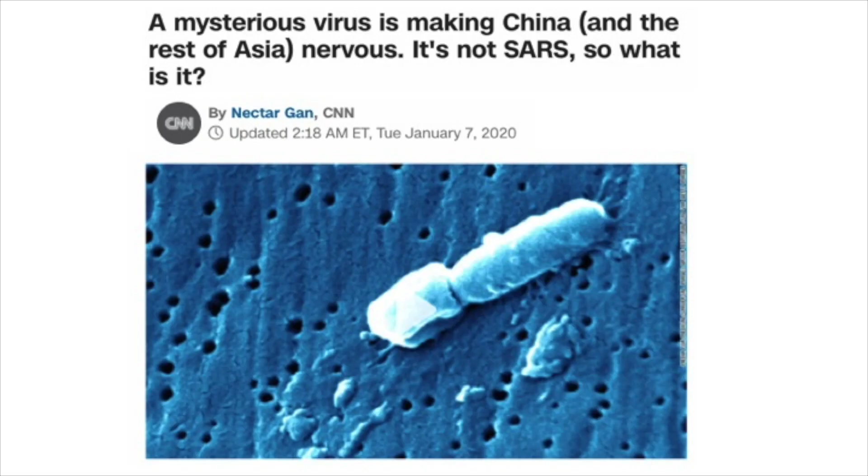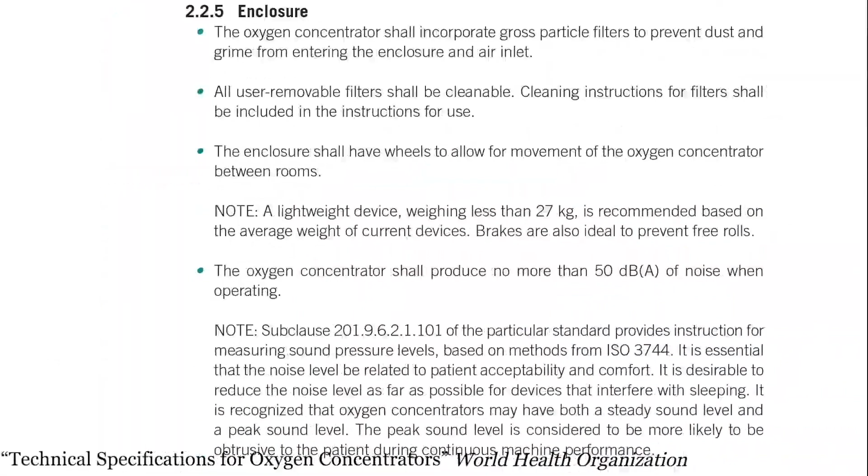We are Mechanical Engineering Senior Design Team Prime 21, working with our sponsor Luke Chow from Prime Manufacturing Technologies to create an oxygen concentrator for low-resource settings. Although there are oxygen concentrators currently on the market, they are not intended for low-resource settings. Our design meets the World Health Organization requirements but minimizes user cost and dehumidifies incoming air to ensure a long device lifetime. These qualities make it ideal for low-resource settings.

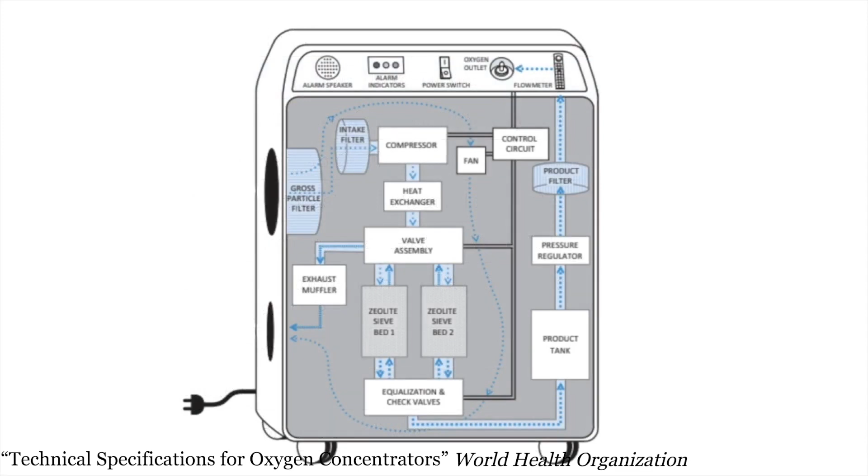Our oxygen concentrator, similar to commercial models, takes in the ambient air, isolates the oxygen, and delivers it to the patient via a nasal cannula. Our system uses pressure swing adsorption, which alternates applying pressure and vacuum to the zeolite. Zeolite is a clay-like substance that can separate oxygen from nitrogen. We talked to Dr. Michael Tsapatsis to learn more about zeolite. These meetings were important milestones for us as we learned about the significance of zeolite pressurization cycles.

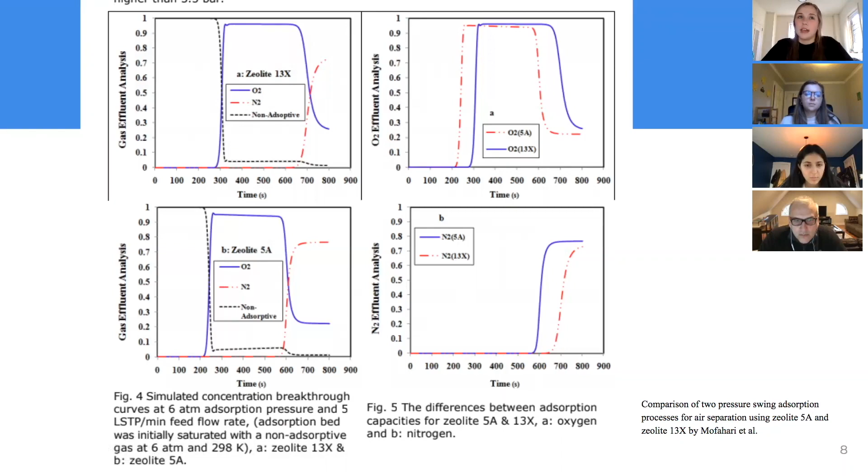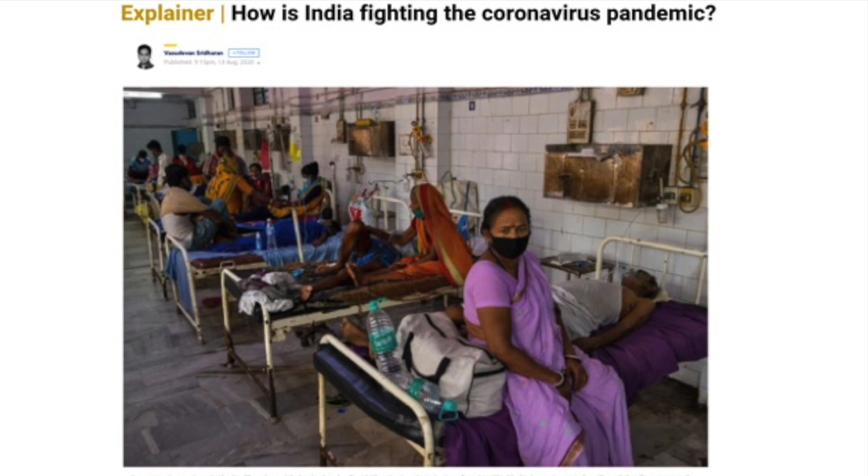The newly concentrated oxygen leaves the zeolite chambers and flows through a sensor, which outputs the oxygen concentration level to the user interface. At the end of our year-long efforts, we have created a device that can produce up to 91% oxygen. This reliable production of oxygen has the ability to save lives of people who don't have access to the medical care they need and deserve, with a cost-effective solution for oxygen therapy in low-resource settings.

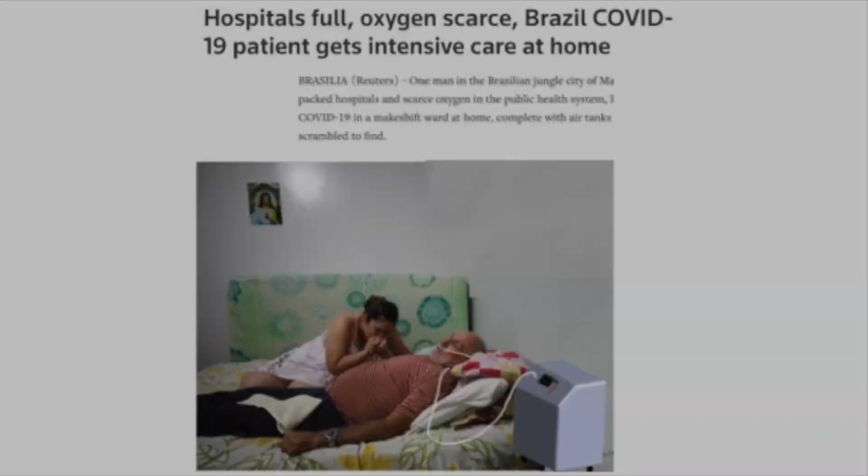My name is Eric. I'm a fourth-year bachelor's master's student studying electrical engineering, and I'm working with Professor Susanna Thon on colloidal quantum dot solar cells. My work focuses on designing new materials for solar energy generation, which is a rapidly growing field that is revolutionizing the way our society can generate affordable, clean energy.

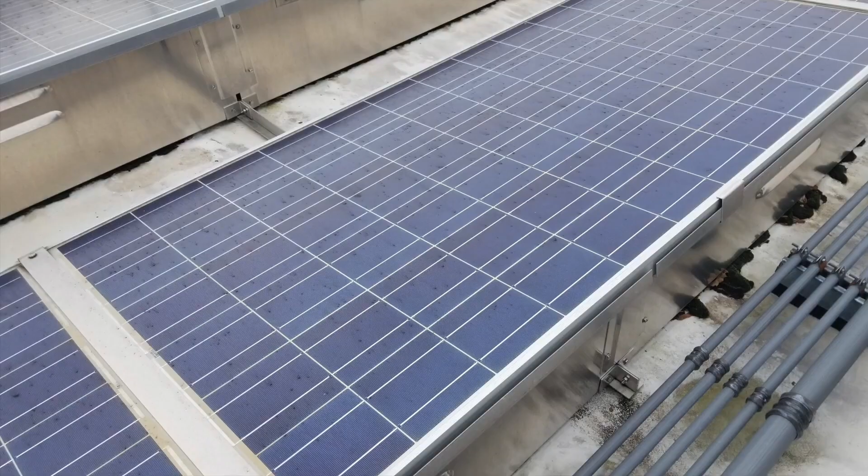Solar cells work by generating electricity from the sun through the photovoltaic effect, where absorption of light in a semiconductor excites electrons that carry electrical energy. Notably, silicon shows this effect, and most of the solar cells that we see on buildings or in solar farms are made of silicon, in large part due to its low cost.

However, silicon is not an ideal material for solar cells. In terms of physical properties, it is heavyweight and rigid, so it is impractical for applications that require low weight, such as powering cars, airplanes, or mobile devices. In terms of optical properties, silicon is a poor absorber of infrared light, which is bad because a significant amount of energy from the sun is in the infrared regime.

We are thus in search of a material that is thin, flexible, lightweight, and can efficiently absorb infrared light. Lead sulfide colloidal quantum dots are a cost-effective material that fits all of these requirements.

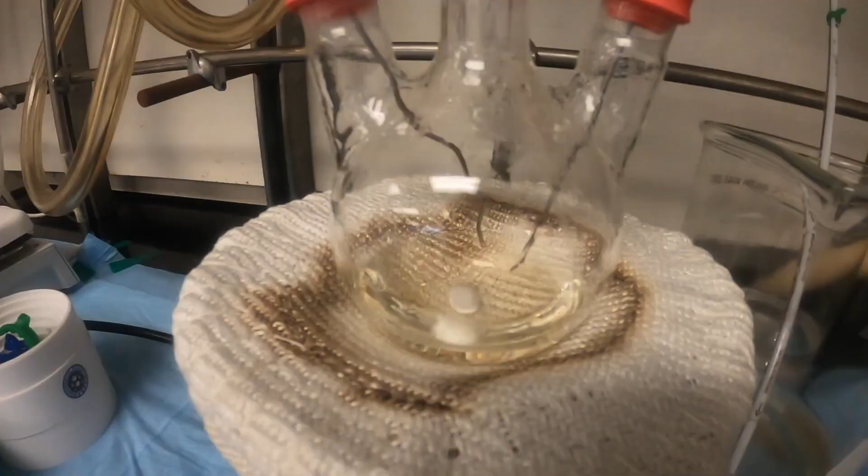They take the form of spherical nanoparticles suspended in a liquid, which is like a paint. We can then deposit our solar paint onto a substrate to form a lightweight, thin film.

In order to make a solar cell from colloidal quantum dots, several layers with different functions are needed. My research group showed that one of these layers, the hole transport layer, whose function is to transport positive charges through the cell, is currently limiting the efficiency of colloidal quantum dot solar cells. To improve the device performance and the amount of energy generated, we must find methods to improve charge transport in this layer. This was the focus of my research project over the last year.

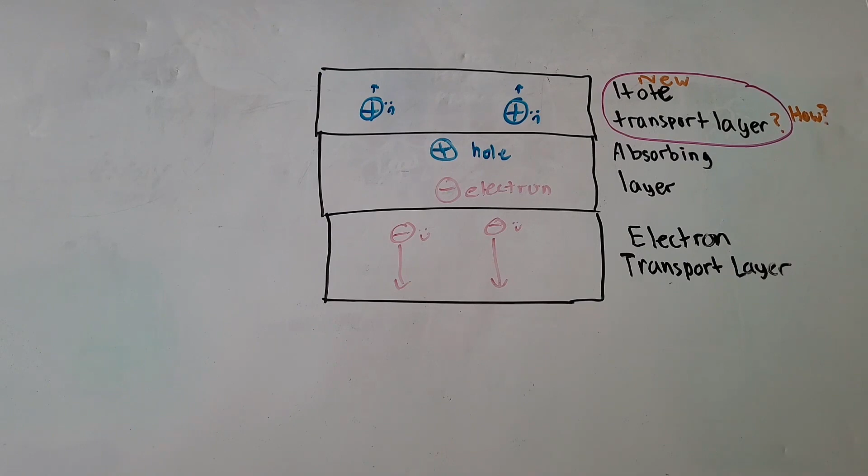Working with my collaborators, I have accomplished this task through sulfur infusion. By evaporating sulfur atoms onto the ethane dithiol covered quantum dot hole transport layer, we can effectively fill in gaps left by incomplete ethane dithiol coverage. This means that charges are less likely to get trapped within the material.

With this method, we demonstrated an efficiency improvement from 8.9 to 10.4%. More importantly, the same strategy could be used in multi-junction solar cells, which take advantage of the infrared absorption of colloidal quantum dots and have higher total efficiency limits than conventional solar cells.

With work like ours to improve solar cell performance, we hope that our technology may soon be sufficiently mature to supplement silicon solar cells and to expand the applications for solar energy. Someday, we hope to see our solar paints applied to every surface that receives sunlight, including buildings, cars, and even roads and other infrastructure. I'm excited to be working on furthering the solar energy revolution, and I'm confident that our research and the other exciting energy research being done at Hopkins will have a large impact on the future of our planet.

Imagine that you're going to work, and every day you work in a world with no colors or lights. Or instead, imagine that you have to do your job in a world with no sound.

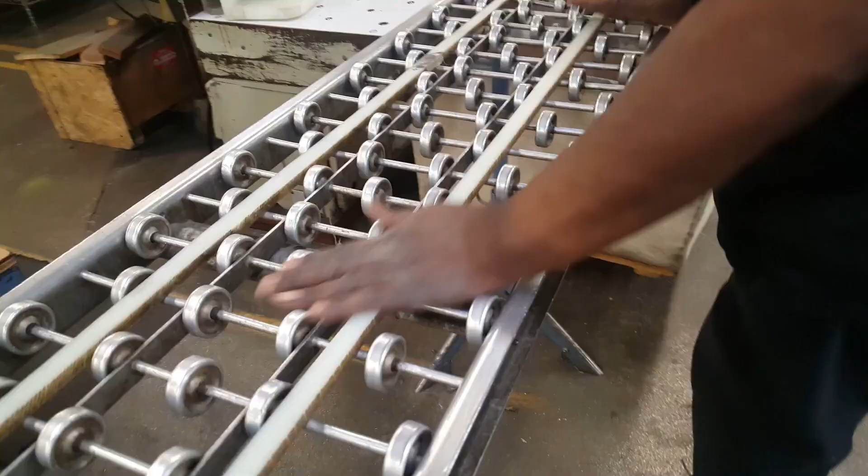At the Blind Industries and Services of Maryland, or BISM for short, most associates don't have to imagine. These are everyday conditions for BISM associates who are blind, deaf, non-native English speakers, and more. Yet their disabilities don't stop them from producing a wide range of products such as U.S. Army jackets, notepads, and hand sanitizers.

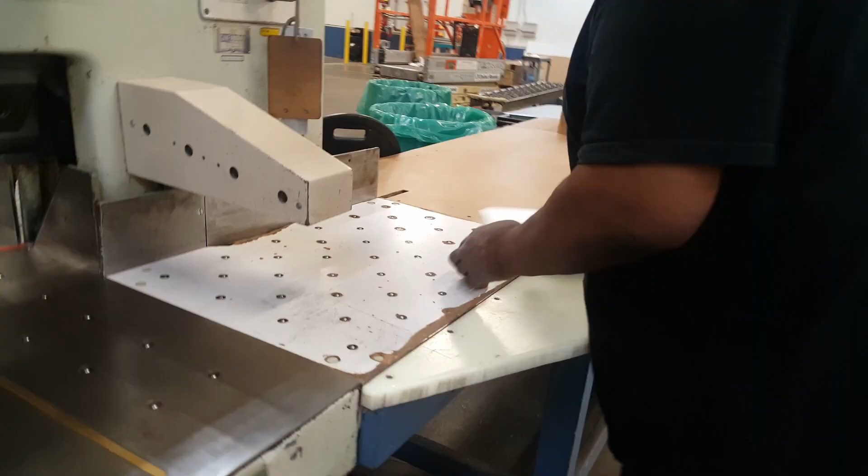At BISM, our team was given one challenge: make production information accessible. Knowing production information is an important step towards increasing associate independence. If associates know that they are ahead on their goals, they can decide how they want to aid production without supervisor instruction. In response, we created a system with three main parts: input, storage, and output.

We needed a system that counted how much of a product was being made, stored that information, and then made it accessible to associates. Five computer science students, two mechanical engineering students, and one Peabody music student later, this is how we did it. We began by listening to our users.

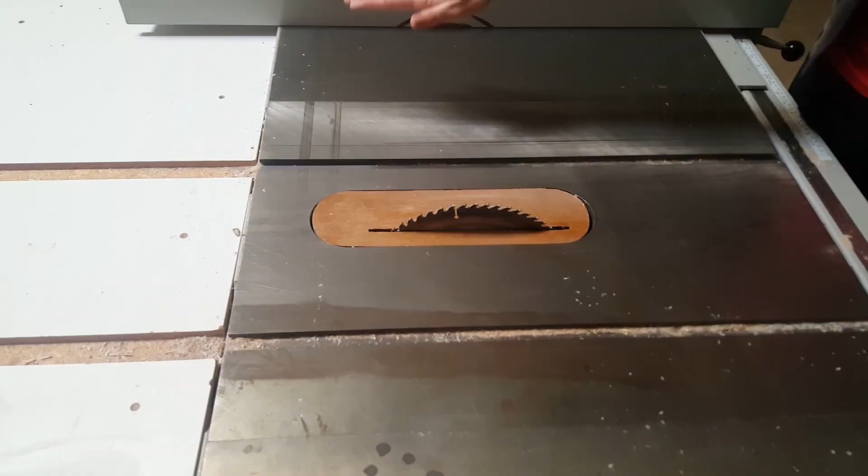Our users experienced the world in ways we couldn't begin to comprehend on our own. During our entire process, we regularly checked in with users so that they could lead us to solutions that were natural extensions of their needs, rather than reflections of our own assumptions.

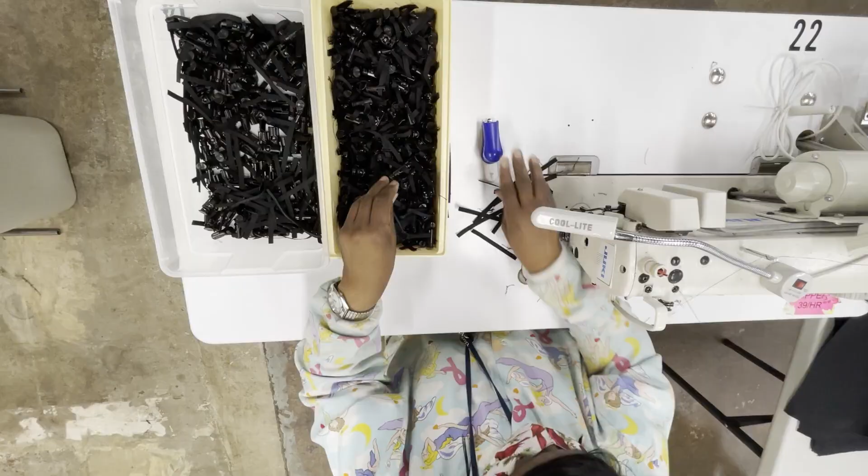For our first section, input, based on our testing and cycles of user research, we recommend a motion sensor prototype for our input system. Looking forward, we hope to change the device's physical structure to be able to count larger and more fragile items, and wirelessly connect the motion sensor to send information to a database.

For our second section, our storage system, we're currently using a real-time Firebase that's stored in the cloud to keep track of our data. Firebase makes it easy to share data in real time across our app users. However, looking forward, we're considering shifting to SQLite as it's easier to write data to in the long term. We've begun to prototype with this as well.

Our SQLite database converts data from an Excel sheet. We use the database helper to check what's in the database. Then we get our data through an abstraction layer, which accesses information through an adapter. This adapter connects to our code for a mobile app that displays the data.

Throughout our process, we made sure that the database can connect to the cloud storage system that BISM prefers. We aim to fully integrate our SQLite database to the input and output method we end up with for our next steps. Our third section, Output, tested two systems, a mass texting system and a mobile app.

From our CallFire texting system, we concluded that the associates would benefit most from an opt-in system with customizable options for how often or when associates wanted updates. According to our users, the majority rely on their smartphones to send and get information, but not everyone has a smartphone. So the texting system would be a beneficial addition or alternative to the app.

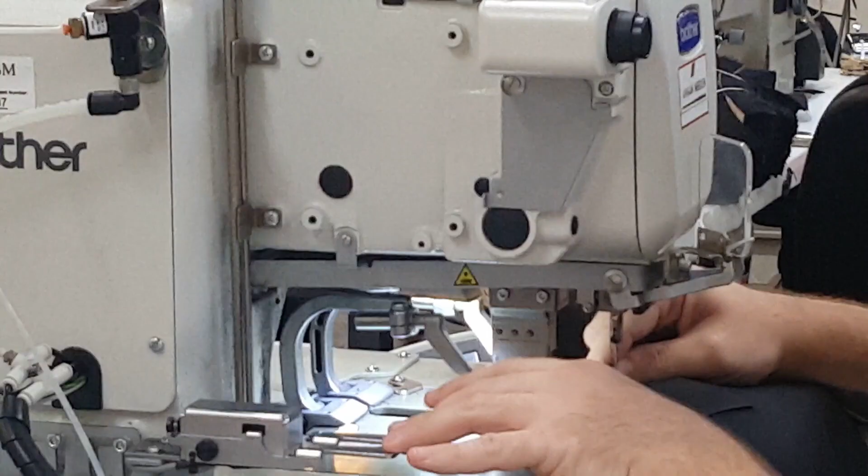For sighted people, colors can help distinguish items in beautiful or fun ways. But for those who don't access colors the way we do, what is the equivalent of colors but for the ears? Music. For the hands, texture. And for design, empathy. Even with engineering, there was no other way we could have gotten to where we are.

Hello and welcome to Johns Hopkins University's Senior Design Day at the Whiting School of Engineering. We are from the Environmental Health and Engineering Department. My name is Olin. I'm here with my team members, Lydia, Jasmine, and Breen, and we're here to present to you about a modular mobile air quality monitoring laboratory.

A brief motivation for our design project: ambient air pollution poses a serious environmental health threat, leading to millions of deaths worldwide. Common point sources of pollutants are typically caused by human activity. However, the current air quality monitoring system is ill-equipped to detect more localized threats.

Many aspects of atmospheric aerosols are still not well understood, such as their impact on air quality at different spatial scales. Typically, spatial characteristics are studied using modeling or remote sensing. However, these methods produce limited data sets since the sensors can only test a small number of air quality parameters with longer time resolutions. Additionally, atmospheric aerosol concentrations can change quickly and vary greatly spatially. Baltimore City and surrounding areas lack high-resolution, high-quality air quality measurements.

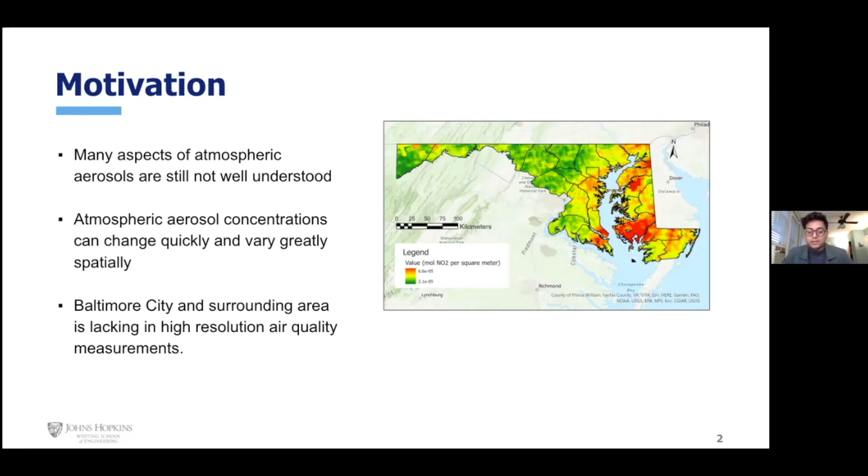Air quality estimates would be greatly improved through the use of a mobile design lab. A mobile air quality monitoring lab would enable researchers to go beyond the detection of criteria air pollutants, but rather detect trace gases at high spatial resolution. The mobile design lab should be robust, versatile, and reliable.

In order to meet these objectives, a manifold must be designed to accommodate the desired suite of air observation instrumentation. The manifold should be modular and designed with foresight as to the intended and possible uses in the future.

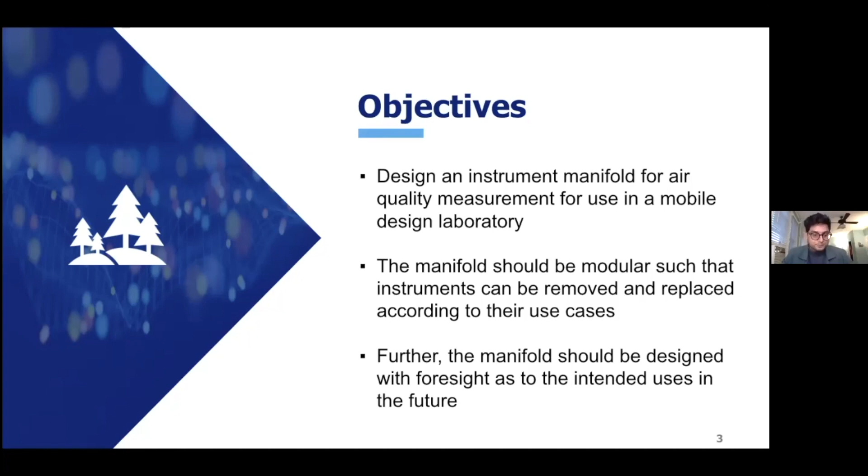The three main use cases for our modular manifold include urban air, natural gas, and agriculture. The manifold would measure criteria air pollutants, smog precursors, black carbon emissions, and particulates in urban settings; methane emissions from industrial natural gas operations; and agricultural air pollutants such as ammonia.

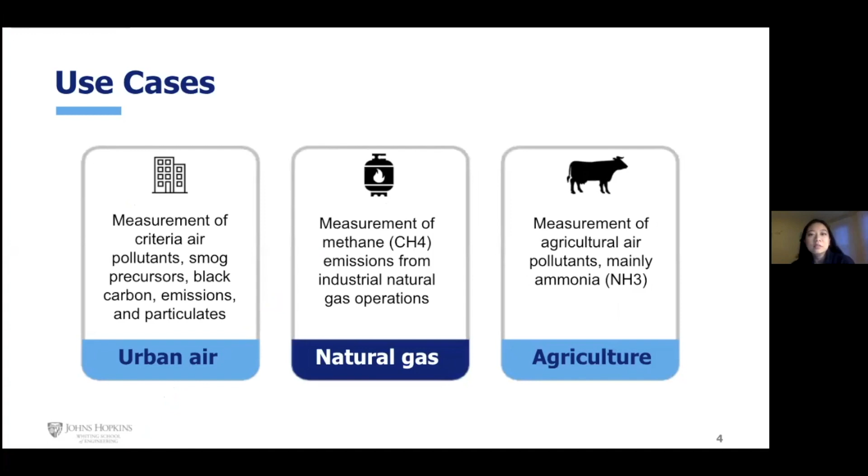Our first manifold design is for urban air pollution. This includes 11 instruments: 6 for gas phase measurements, and 5 for particle phase measurements. Because this manifold includes the most instruments, we used its inflow rate to determine the diameters of the inlets for all manifolds.

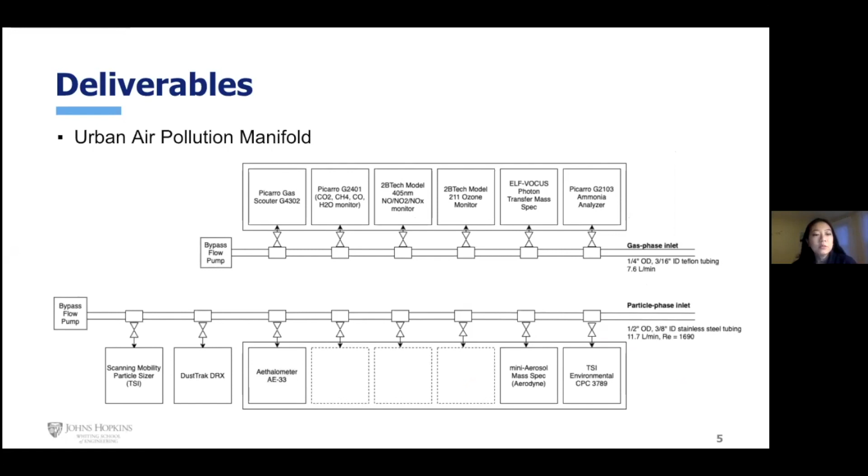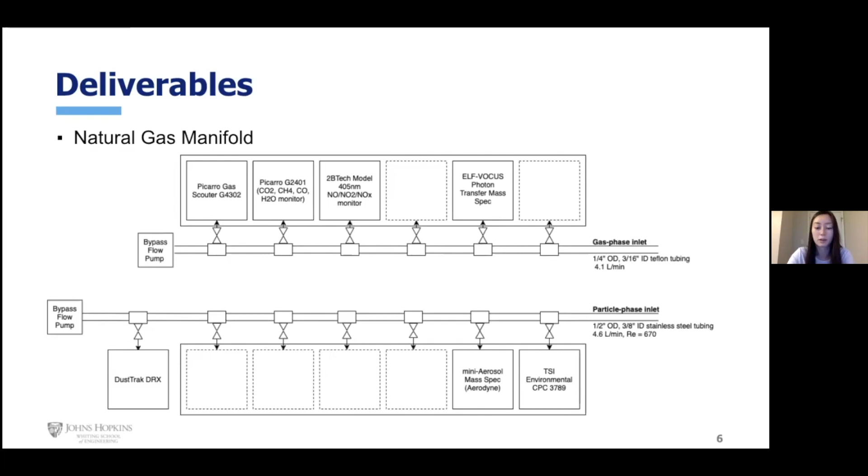Our second manifold design is for natural gas pollution. This includes 7 instruments: 4 for gas phase measurements, and 3 for particle phase measurements. Total flow rate required for the gas inlet is 4.1 liters per minute, and total flow rate required for the particle phase inlet is 4.6 liters per minute, with a Reynolds number of 670, which is within the range for laminar flow.

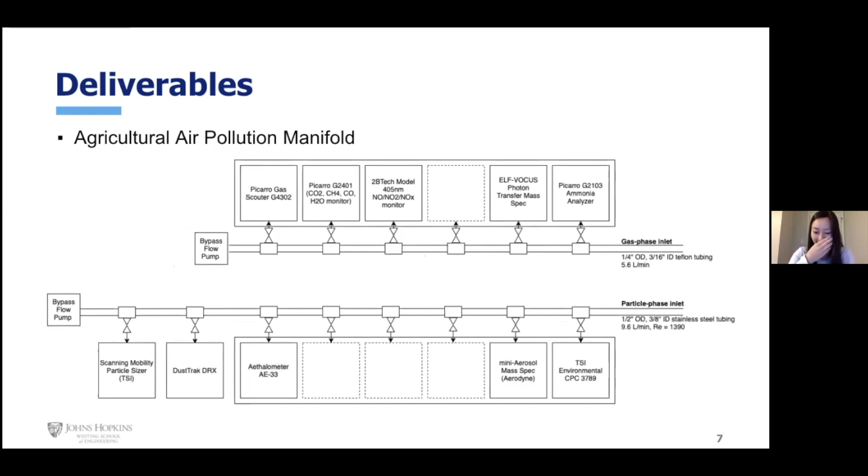Our third manifold design is for agricultural air pollution. This includes 10 instruments: 5 for gas phase measurements and 5 for particle phase. Total flow rate required for the gas inlet and particle phase inlets are 5.6 and 9.6 liters per minute respectively, with a Reynolds number of 1390, which is within the range for laminar flow.

Moving forward, we have a couple of ideas of what we can do with our new manifold. Our manifold was designed to be future-proof for new rack-mountable instruments. In the future, we can select a vehicle that has appropriate requirements for volume and weight, and design a prototype that can house this manifold. Finally, implementation and experimentation in the vehicle can allow for modeling and sampling of air pollutants.

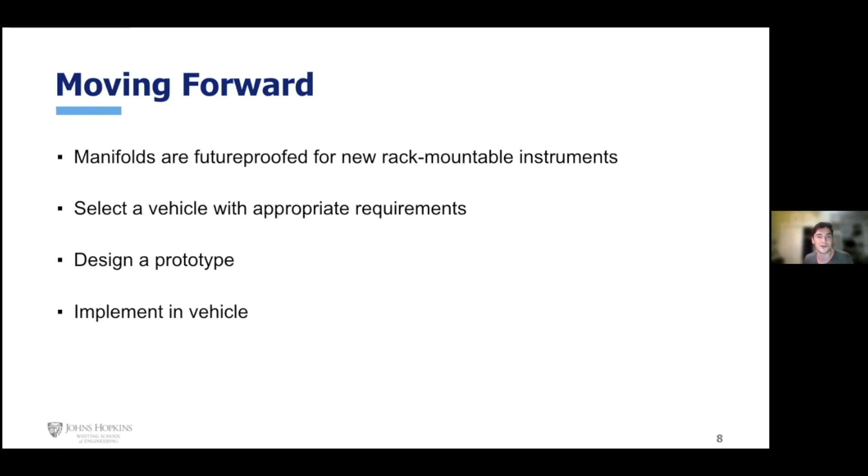Hello, my name is Brennan, and alongside Annabelle Mungan, Lindsay Pitts, and JJ Tia, our senior design project was on filter backwash storage design for Western Branch Wastewater Treatment Plant.

Western Branch Wastewater Treatment Plant is designed to treat 30 million gallons of wastewater every day. Western Branch uses 11 anthracite sand filters to meet strict contaminant removal requirements. These filters must periodically backwash, done by pumping water to remove solids that clog the filter media. The dirty backwash water is then sent back through the plant for treatment.

An ongoing issue with the facility is inflow and infiltration, that is, millions of gallons of excess water that enter the plant through cracked pipes and drainage. Storms can trigger large flows into the plant that force the filters to be bypassed due to a lack of capacity to treat the dirty backwash water, which then decreases the contaminant removal ability of the plant.

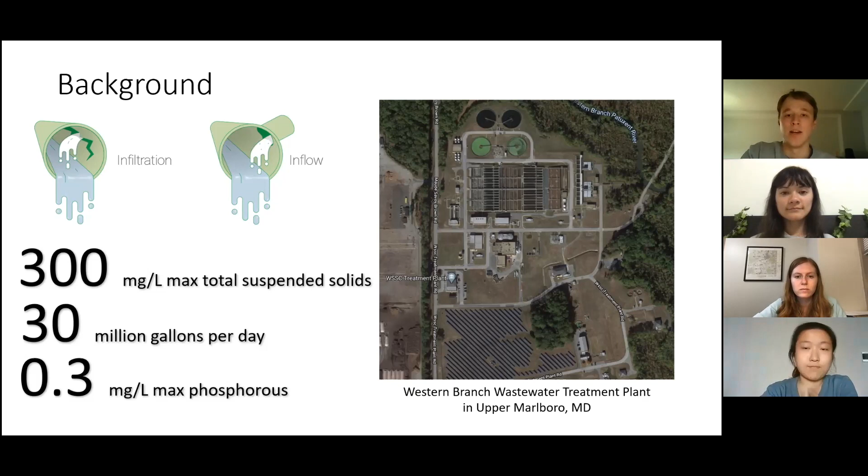The final design proposed is a 3 million gallon circular tank of precast concrete with 1.5 feet thickness and a maximal water volume of 2.7 million gallons. The radius is 80 feet, which is the largest the tank can get without risking encroachment on surrounding paths and objects.

The schedule is proposed based on WSSC Water's practice, which includes design and permitting phase, the bid phase, pre-construction, construction, and post-construction phases. The process would take over 3 years to complete, over 4 if considering the post-construction testing and inspection.

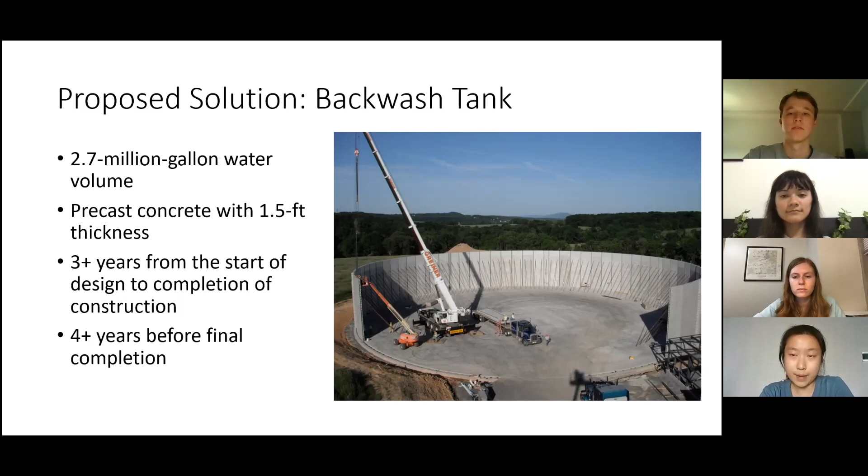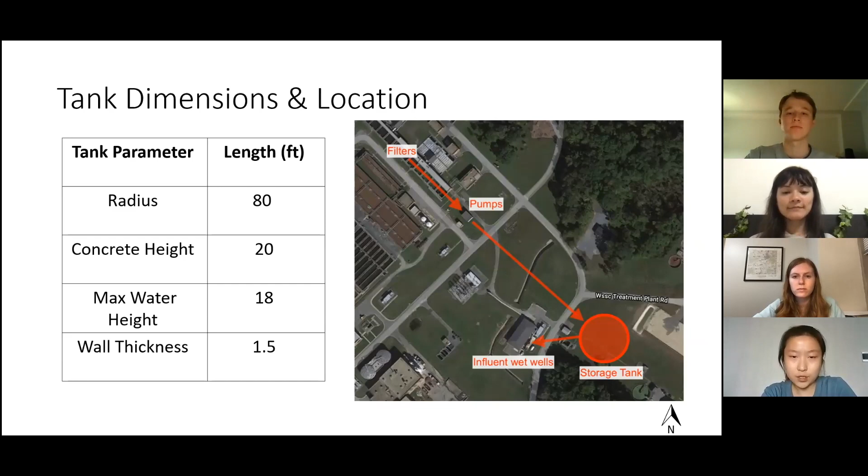The elevation difference between the filter's tank and the influent station can be sufficiently powered by only one set of pumps. The soil at the property was determined to be suitable for new constructions, but further geotechnical investigation may be necessary to confirm it is practical for actual application.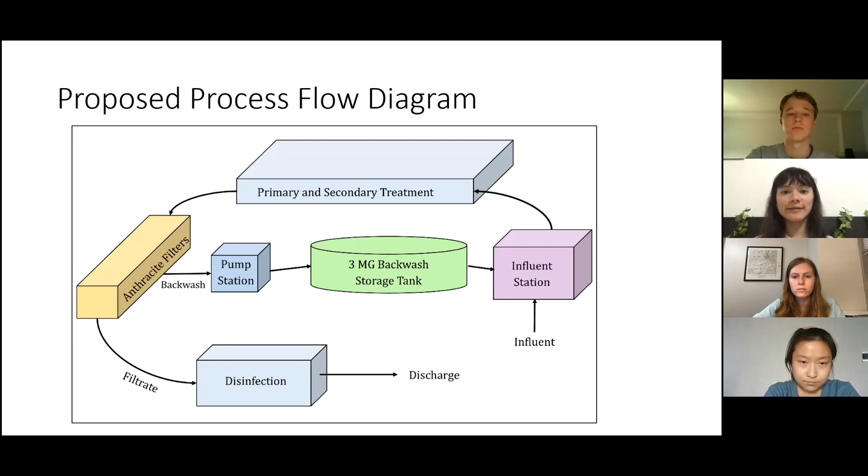The hydraulic design centered around designing pumps to transport the backwash from the filters to the storage tank. Using the energy equation from fluid dynamics, total dynamic head across the pumps was calculated, and vertical turbine pumps were sized in duplicate at 100 horsepower for the low backwash flow rate and 200 horsepower for the high backwash flow rate. This model shows a side elevation view of the hydraulic system.

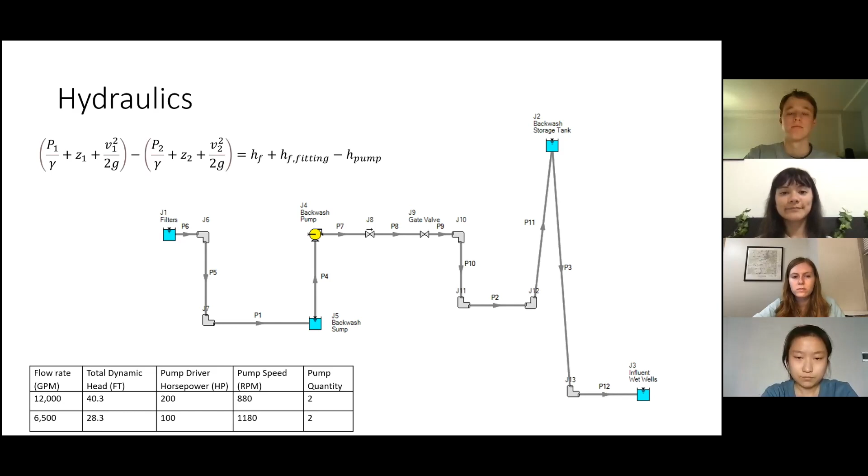In order to determine the amount of solids in the filter backwash, we measured the turbidity during one of our site visits. The turbidity was measured every minute during the backwashing.

After taking the turbidity profile, we investigated several solids handling options, including mixing and sedimentation. Ultimately, we determined that the most cost-effective solution for such a large tank would be to manually rinse the tank out when water levels are low.

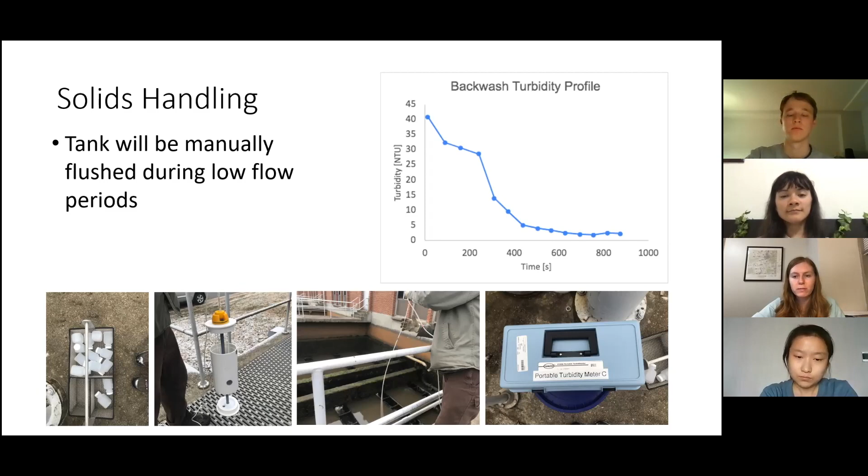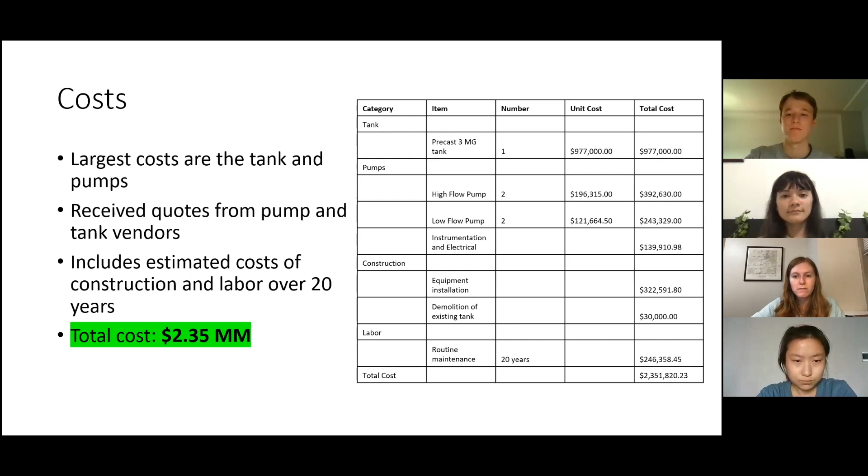The largest costs of this project were the tank, which was just under $1 million, and the 4 pumps. The costs of construction and labor over a 20-year period were also calculated, bringing the total estimated cost to about $2.35 million. Thank you. We hope you enjoyed learning more about our project.

Hello everyone, we're a team of environmental health engineers here at JHU, and we were interested in COVID-19's influence on ambient air pollution. My name is Reed. I'm Pat Dye. And I'm Jillian Hessler.

The COVID-19 pandemic led to extensive upheavals in numerous facets of our daily lives. One major change was the institution of mandatory stay-at-home orders during the early months of March, April, and May of 2020. During this period, 42 states instructed all non-essential workers to work remotely and not travel to work.

This resulted in a dramatic decrease in commuter traffic, so much so that the U.S. Department of Transportation saw decreases of up to 40%. Numerous studies in the past have found significant relationships between vehicle transportation and ambient air pollution, but there have been few opportunities to accurately quantify changes in air pollution as real-world traffic patterns change.

Decreased transport associated with the COVID lockdowns has a direct impact on air quality. So we wanted to focus on criteria pollutants as defined by the EPA that are also highly associated with vehicle transport. For those reasons, we are currently including nitrogen oxides and particulate matter of the 2.5 and 10 micrometer diameters.

Our overall question for our project is, to what extent did the effects of COVID-19 lockdowns make 2020's ambient air pollution statistically anomalous? Our overall objectives are to analyze air pollution measurements in order to quantify any changes associated with the COVID pandemic.

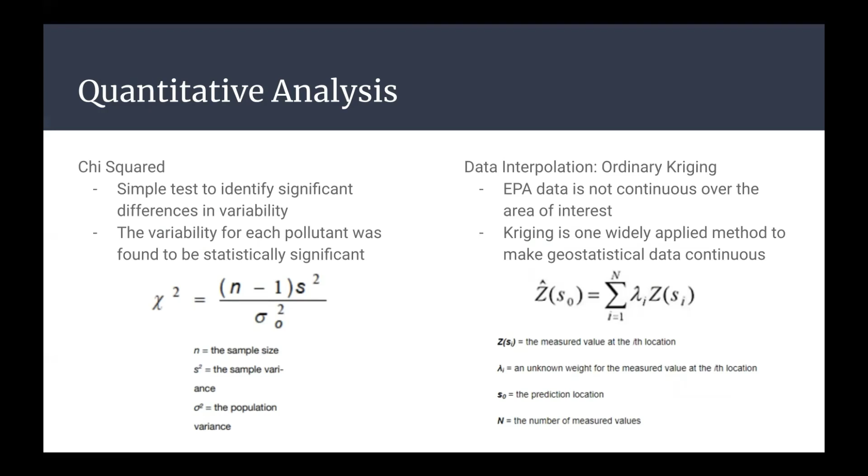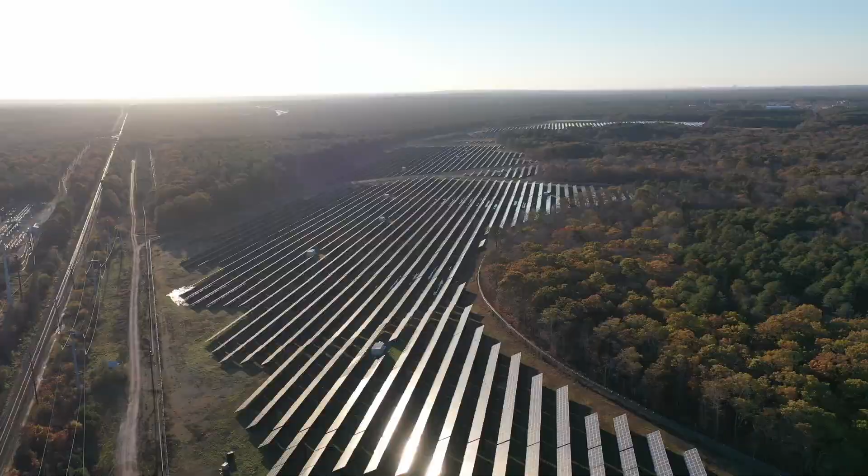Renewable energy comes from replenishable sources like water, sun, and wind. They are some of the cheapest ways we can start tackling a large portion of our pollution problems now. The US Department of Energy predicts that by 2035, wind energy will make up 35% of US energy generated, and by 2050, there will be 100,000 jobs in wind energy development.

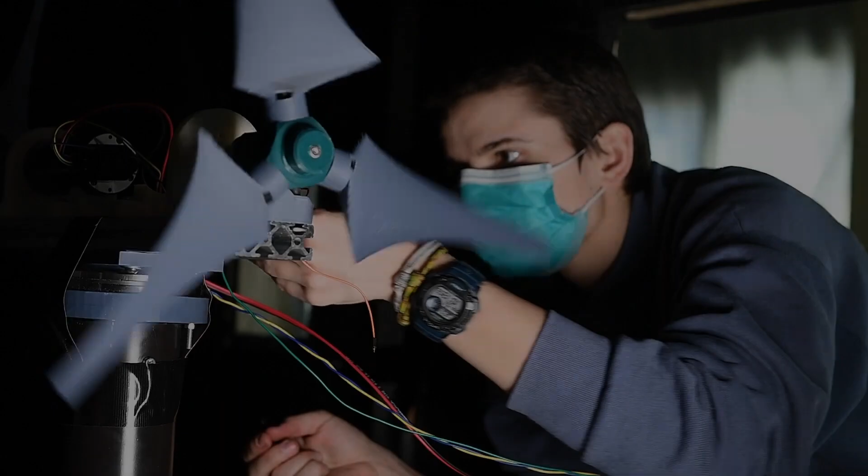But how do we find people to do these jobs? Hi, my name is Willa, and this is why, last year, I started the Hopkins Student Wind Energy Team. Our team is one of 13 teams from US schools competing in the National Renewable Energy Lab's Collegiate Wind Competition.

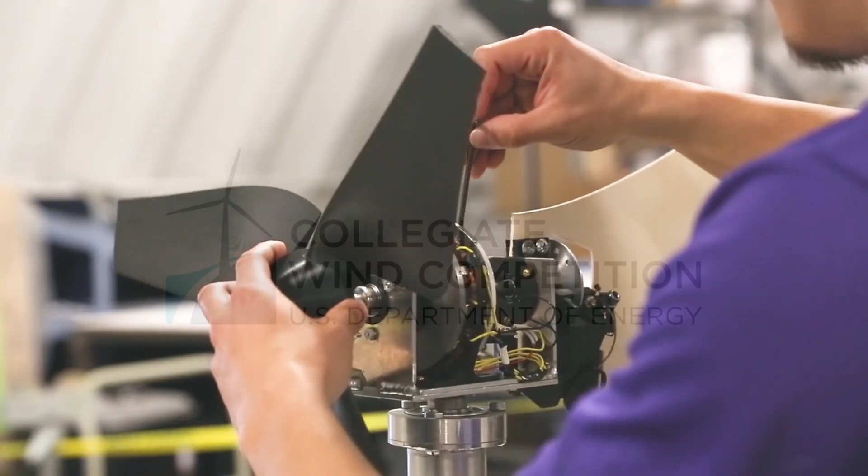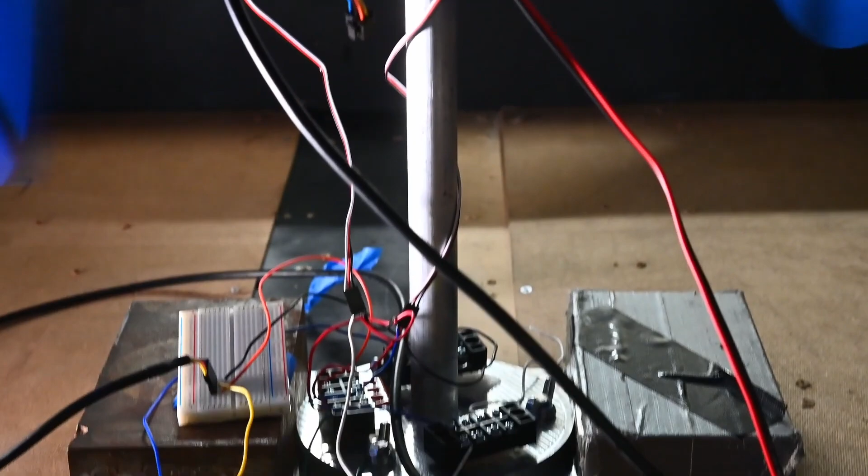Our team has been working on designing, manufacturing, testing, and prototyping a fully functional miniature wind turbine. Now, this process allowed us to apply what we learned in the classroom to real issues of today and helps us make the idea of joining the industry more possible.

While we managed the risks of a changing global supply chain and collaborating remotely in the global pandemic, our team was challenged to make a turbine with the following goals: one, create a safe turbine; two, maximize performance over its power curve.

Make the turbine autonomous. Our turbine has 4 key subsystems.

The rotor and blades use the forces in the wind to spin a shaft. While most teams in the Collegiate Wind Competition build turbines with a single set of turbine blades, our team saw an opportunity in building a second set of wind turbine blades, spinning in opposite directions to harvest the energy shed by the first set of rotor blades.

The generator and transmission turn the energy of spinning shafts into electricity. It is made up of a brushless motor driven to produce electricity, and a timing belt for combining the power from the 2 turbines' rotating shafts.

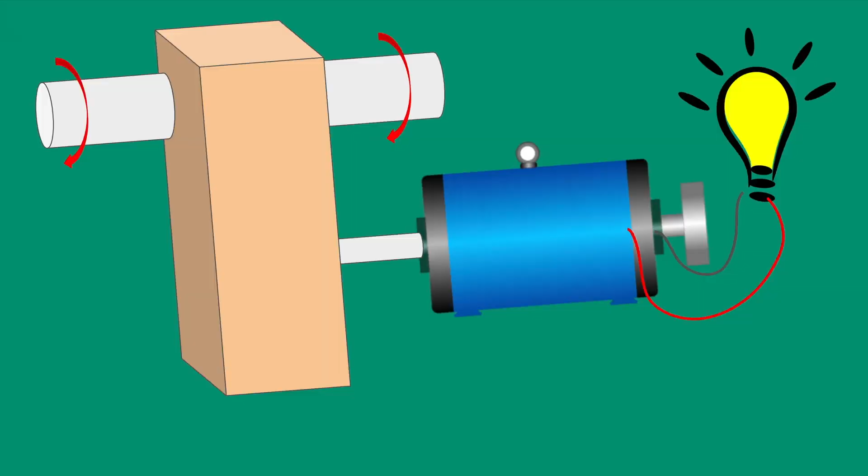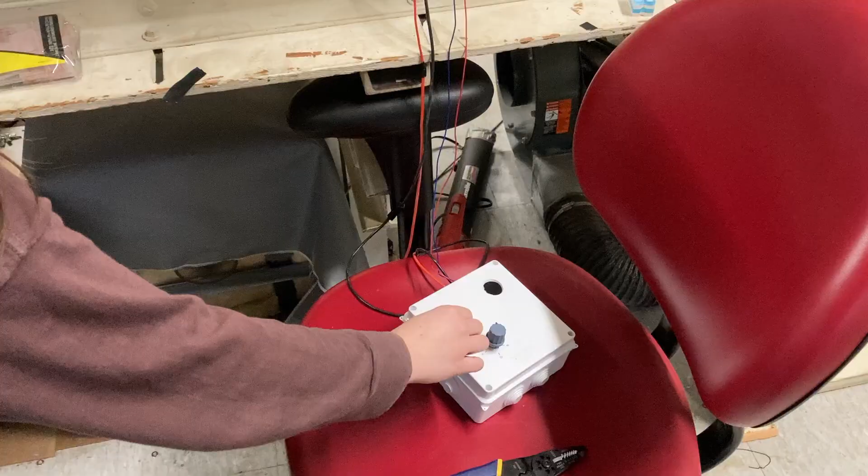The electronics and controls monitor the safety of our turbine and adjust the quality of the electricity that our turbine produces based on our needs. It is made up of current, voltage, and shaft speed sensors to monitor wind turbine performance in real time, a microcontroller and linear actuator to manipulate the angle of the turbine blades, a series of power resistors that we are using as a changing load based upon wind turbine performance, and low-level logic circuits to stop the turbine when there is a fault, such as our load disconnecting or when an emergency stop button is pressed.

The structure holds everything together, positioning the turbine into the wind. It is made up of a tower and passive yaw bearing assembly, which uses the forces in the wind to rotate the turbine until it is centered in the airstream. The structure also supports the rotating shafts, generator, and transmission.

We tested our turbine in the Corson Wind Tunnel in Professor Lee's lab on campus. Our prototype successfully spun 2 sets of turbine blades, and we could monitor our power output with our custom electronics. Here are the results of our test.

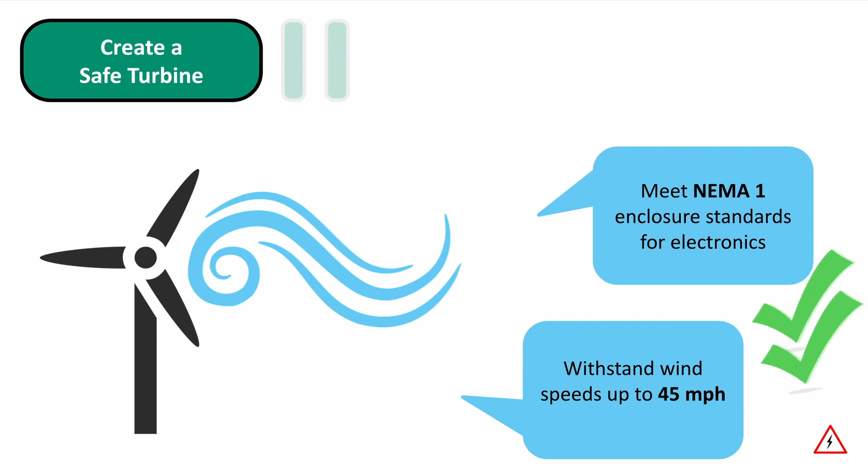Our turbine is safe enough, and it automatically shuts down whenever the emergency button is pressed or the load is disconnected from the turbine. We maximized performance. We produced positive power at 4 meters per second wind speed, reaching a maximum of 30 watts at 11 meters per second. Our turbine is semi-autonomous.

It executes the desired range of pitches with no user input, and we manually select our wind speed and load values.

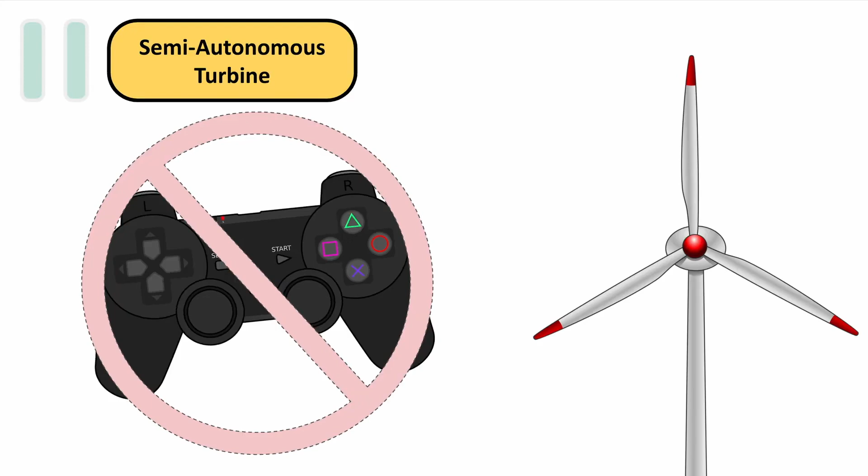From my time with the wind energy team, I learned how to break big projects down into smaller tasks and trust the process. Even small progress each week counts.

If you'd asked me 2 years ago if I was interested in renewable energy, I would have said no. I came to JHU set on working for a company like Boeing, or going into military designing spacecraft. Through my work with the team, I've really gotten to see all the awesome innovation happening in renewable energy, and I'm more open to it now.

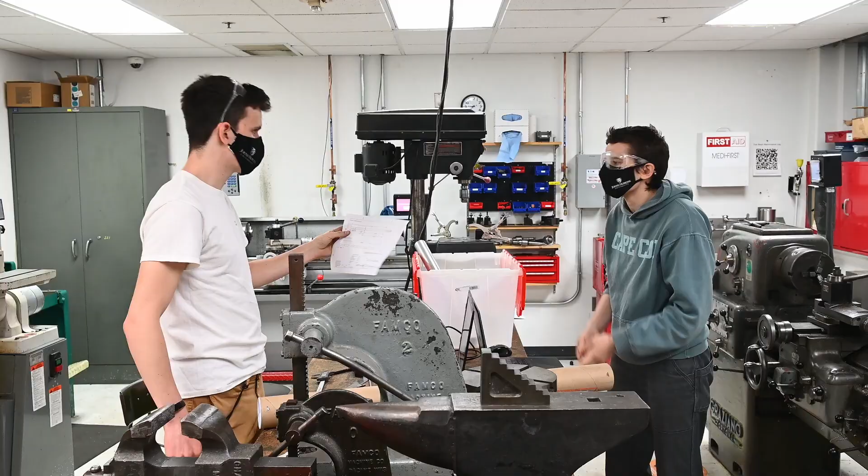I loved having the freedom to fail while exploring some of the most exciting technological innovations in the industry alongside my peers and mentors, and while building towards the future I want to live in, a better, more livable, more beautiful world.

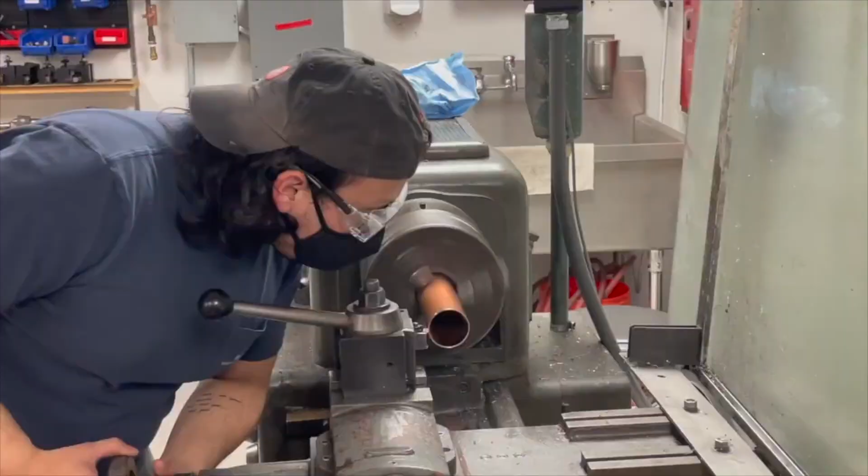Hi, we're Team Pulsape, and for our project, we've teamed up with the Maryland Zoo to design an electrocardiograph to measure the heartbeat signals of chimpanzees.

Because the current methods of measuring the chimp's electrical signals are quite slow, expensive, and generally require the chimps to be put under anesthesia, we needed to come up with a more efficient and cost-effective way of measuring the chimp's electrical activity. This is really significant because chimps are very prone to heart diseases, so detecting signs of them early on can greatly increase the chimp's survival rate.

This is our device. It's a bar that can read the electrical activity from chimpanzees. When the chimps grab the bar, they complete a circuit that can measure their heartbeat. The idea behind the design is that hanging is already a natural behavior for chimpanzees, so they don't have to learn anything new.

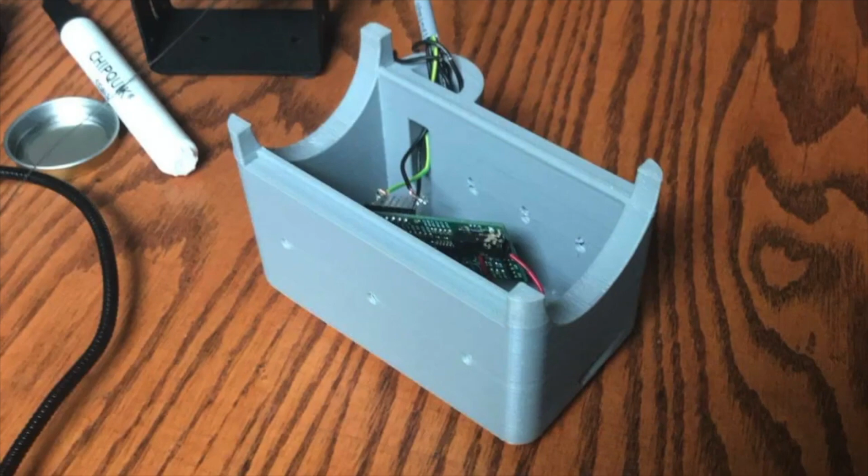So, to go into a little bit more detail about our product: we have a 3D printed box which contains a printed circuit board that acts as the brain for the entire device. The box itself is designed with rounded edges and as few corners as possible to make it difficult for the chimps to grab onto or pry it open.

We have a copper pipe around a wooden bar because it has the best balance between conductivity and durability. The copper pipe actually extends a little bit into the box. This is to make sure that we can connect wires from the PCB to the copper without the chimps being able to access it from outside.

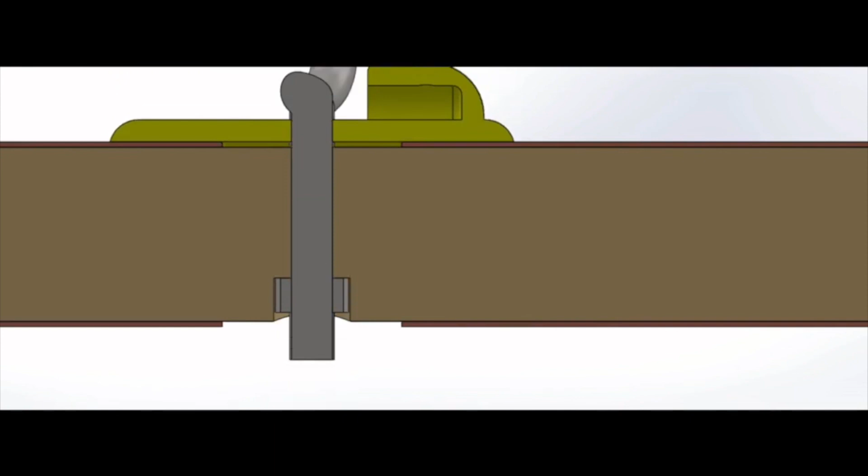From inside the box, our electronics will be able to measure an ECG signal from the copper pieces and send the signal through a cable, which will ultimately be recorded by the computer.

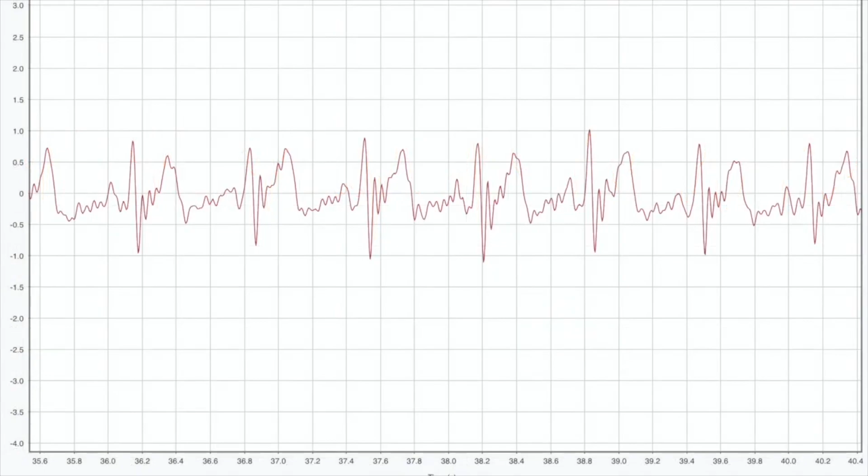We were able to test our device with chimps at the zoo and recorded the following signals. The zoo's cardiologist has confirmed that these readings are useful and helpful for the purposes of monitoring chimp health, and we're really excited for them to continue using our device.

We're making sure to provide the zookeepers with a manual and backup parts so that when we're not around, they can still use our product for years to come. And we hope that when the day comes when there is a potential heart problem with the chimps, the zoo can use our device to make sure they get the right treatment they need in time.